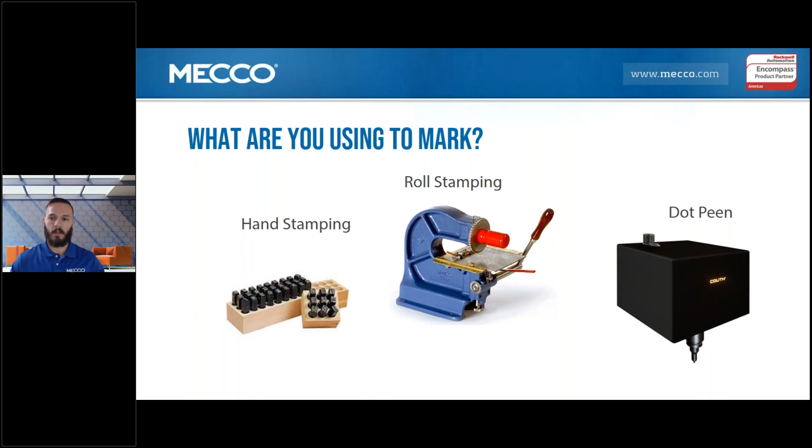But these technologies are slowly fading away because people are really understanding the value of high quality, fast marks. If you're doing direct impact marking, you should be using some sort of dot peen mark, but if you aren't yet, you're not alone. If you're not investing in the right equipment, chances are you're not gaining that competitive advantage. So almost half of US manufacturers, according to a Deloitte study, have not caught up with today's technological opportunities.

I do a lot of work in the oil and gas industry, and one story that comes to mind is we had a customer in the oil and gas industry that was an industry leader, and when I met with them, they were still using hand stamps. They were putting a lot of information on their products, heat codes, part number, date of manufacture, things like that. And because they were hand stamping all that, they were only able to produce about 10 products a day.

Simply by adding the dot peen technology, they were able to move forward and get to the point where the marking of the parts was no longer the bottleneck, and it helped them really understand where their facility was. Obviously, just getting the mark is the beginning, and I wouldn't say that they're operating at the level of, let's say, the automotive industry, which is typically in the forefront of stuff like this.

But looking at the story, we can see who stands to benefit from adopting this technology. And that's you guys. Right now, modern dot peen technology is still a valuable competitive advantage. Just having the system may give you some basic benefits, analysis like throughput and line efficiency numbers. But without some of the other data that you can gather with the most up-to-date systems, you're not truly able to understand the whole picture.

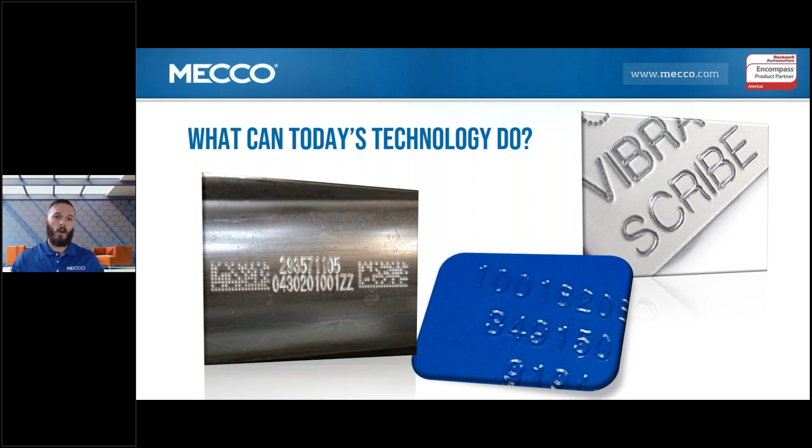So we talked about where we're at, but how do we get there? And the end goal, I think, for every manufacturer is no recalls, no errors, no rework. But talk is one thing; how are we actually going to implement it? It starts with total part marking, meaning every part being produced is tied into a database to reference where that part is and how and where it's going.

And then we look at what information is needed. Is it going to be an automated inline solution or something that an operator has to take to the marker? In an ideal world, the inline solution is great and everything is automated, but we all know that's not always the most efficient way, and it's not always going to be the most feasible solution. So we understand what constraints we're working under and help determine what that end goal for each individual company will

look like. We know getting the parts marked is a priority, typically driven by customer demands, but understanding the application requirements, things like cycle time and marking area, will help us understand what equipment we need. Then we'll look into any additional technologies. A lot of times we're talking about barcode scanners, vision systems, or quality checkpoints. We ask questions like, is the goal to qualify each part? Are we looking to verify the code or scan the code into a database?

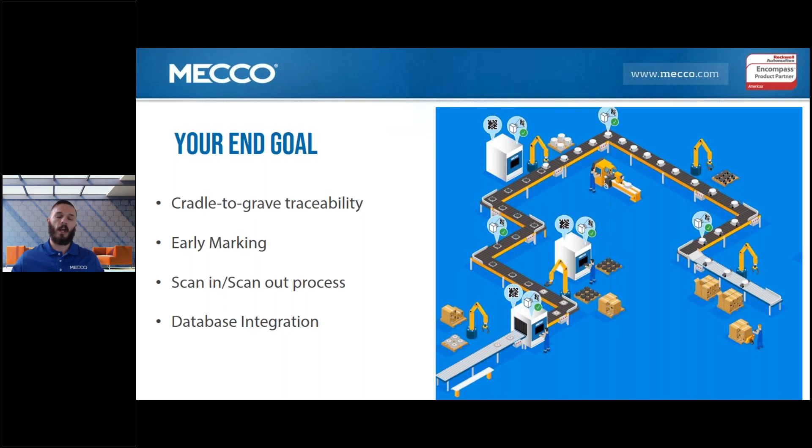So obviously, to start, speed and depth are the number one concern for anybody who's doing marking. You want to make sure that the part is getting marked, that you can read it, and that it's not taking all day to mark it. With our systems, you'll get the fastest, deepest mark in the industry. When you're talking about depth, everyone can say this is the deepest mark in the industry. So I think seeing is believing. I've got a video here I wanted to run through quickly just to show you what we're talking about when we say the deepest.

And you might want to turn your computers down a little bit. I don't know how loud this will be when we run it.

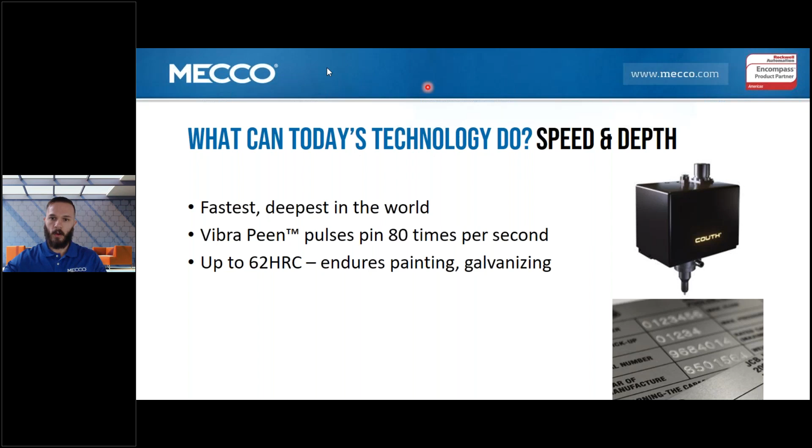So, as you can see there, that's a really deep quality mark, something that we really take pride in. So that's the first point of what your technology needs to have, is that speed.

The next thing is the quality, and you can see a lot of older technologies use what dot peen was, which is that traditional dot peen mark that you can see right here. And that mark, that's okay for a lot of companies, but when it comes to quality, the Vibra Peen or the scribe style mark is just way better.

And these old style marks, one thing that we've seen is that they can be illegible, and based on that illegibility, it leads to shipping issues and quality issues. And then if you're looking at cosmetic marking, the scribe mark is by far the best when it comes to this. It really gives you a crisp mark to go off of.

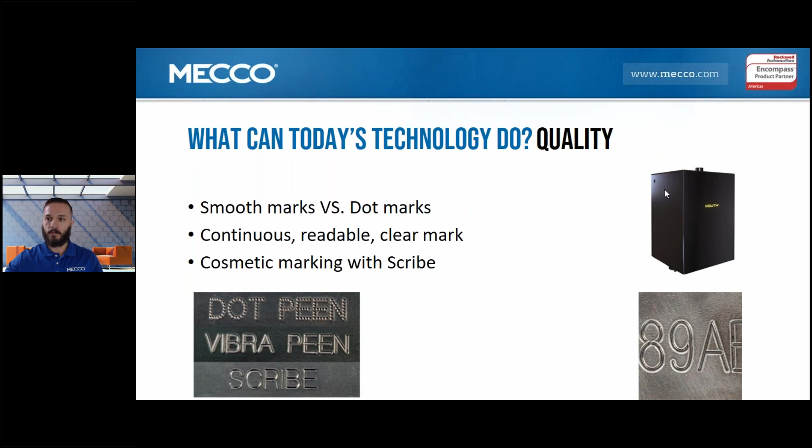So, speaking of the scribe, the next step in our process is understanding your facility constraints. Many of the facilities that we work with are super noisy. They don't have any requirements, but we have seen in the industry where they have a fairly quiet operation and they need something that's going to be safe for hearing and not require any additional PPE. That's where we would really push for you to understand the scribe and its capabilities.

The scribe, when used, allows for quality marks at decibels 30% lower than industry standards require. And so, like I said, it helps with preventing the need to use additional PPE. And so I've got a video again here that'll show you what that sounds like.

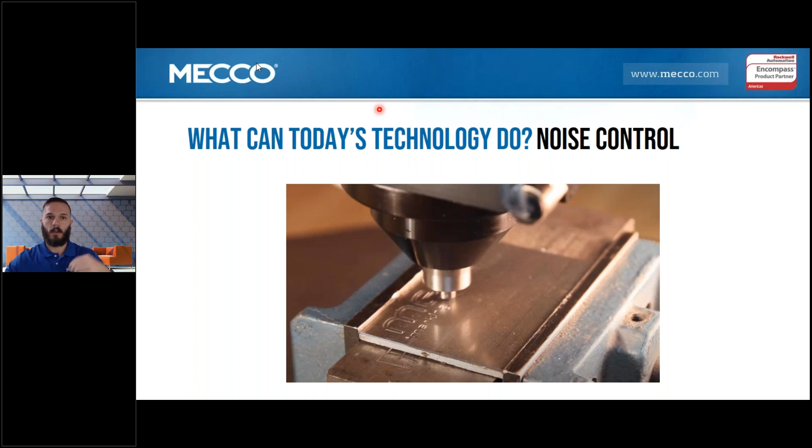So as you saw there, I mean, that is a crisp mark. That's a great machine to use if quality is the most important thing, or if you have issues with noise control.

Once we figure out what technology we're going to use, we're going to start looking into the competitive advantages here. And the first way to look at this is by adding a 2D or QR code to your system. These codes allow the company to input and collect much more data without having a large footprint. I mentioned earlier the oil and gas industry example where they're putting 6-7 lines of human readable code onto the part. And while that may be a requirement, adding a simple QR code like you see here allows you to have much more data in a much smaller footprint.

This one here is just an example, but if you put this on a piece of metal or whatever component you're marking, it would have this URL below it. Obviously, that's kind of a basic example, but if you use that, you can link that URL to a database. This is where we start to get into that scan in, scan out idea. And that's where we're going to start talking about the cradle to the grave traceability. It shows things like where the part's been, what it's been through, quality standards that the part needs to adhere to, and missing shipping standards if the process fails a quality check.

An example we had was we were working with a company that implemented the machine, and at the time they were just doing part numbers. They were doing large quantities, 5,000 or so per batch, and they had 4 batches that were going out, and they weren't tracing what batch was being shipped out. It was, mark the part, send the part.

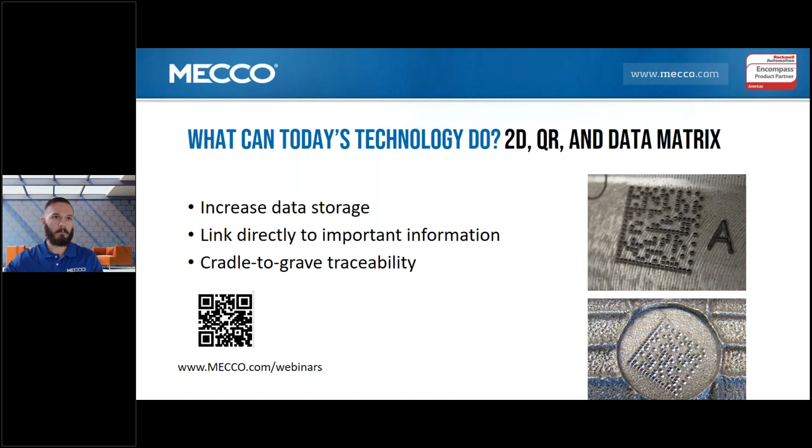And then the last really important piece here is the connectivity. We talked about it in the previous slide, but our machines are able to tie into any ERP or manufacturing process software using Ethermark.

That technology will allow you to use PLC to not only query data, but you can also adjust locations and other parameters, what to mark, all through your database rather than having someone manually changing that. The ability to tie in prevents things like accidental keystrokes, extra spacing, mistyping information, or just completely forgetting information because it's being pulled from that database. It prevents operator error.

Additionally, that system can also output when a mark has been complete, and it tells the software what part of the process it's currently at, where it's going, and as it scans in, scans out, you can see the whole picture. If a part went from being scanned to paint and you missed 4 processes in the middle, it's going to tell you that data. So you'll know, hey, let's see what's going on and why that happened.

We want to make sure that our processes are not only complete, but they're robust. So by adding that, you have that improved security of, okay, I know this is working. And by adding the database, you're preventing things like, we had this one example where it was an automated system, but they had an operator overlooking it, and they started having errors and they weren't entirely sure what was happening. Well, what happened was the operator was getting into the machine and manually changing things, even though they weren't supposed to.

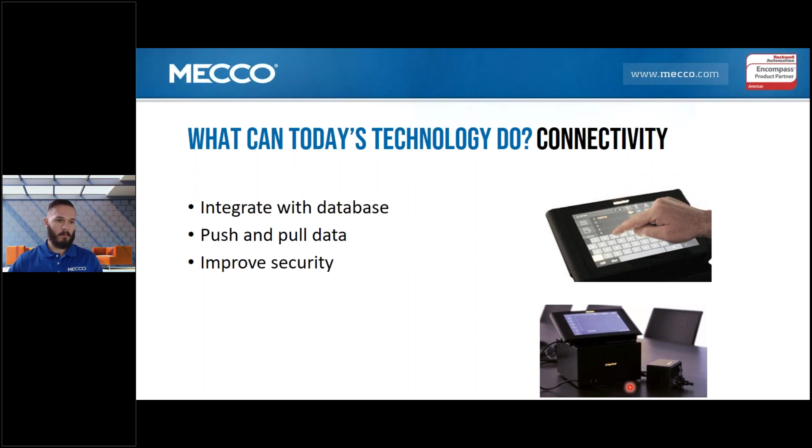So I know I put a lot of information out there. There's a lot of things that you can do with this technology, and I can definitely answer any questions as you guys have them. But no matter where you're at right now, the first thing you need to do is understand what the right solution for your company is. And that can be labeled in short-term, mid-term, and long-term goals.

We want to help you succeed, and you know your company the best. And we think with you knowing your company and us knowing the technology, we can work together to help truly understand what your needs are. And based on that, talk as a team about how to get you that competitive advantage we've been talking about. Typically we start with some basic questions: material, application, what kind of integration you're looking to do, near term and long term. And that'll really get us to the bottom of what the issues you're seeing are. And once we define that, we can really understand what the solution will look like and how we can get to that point.

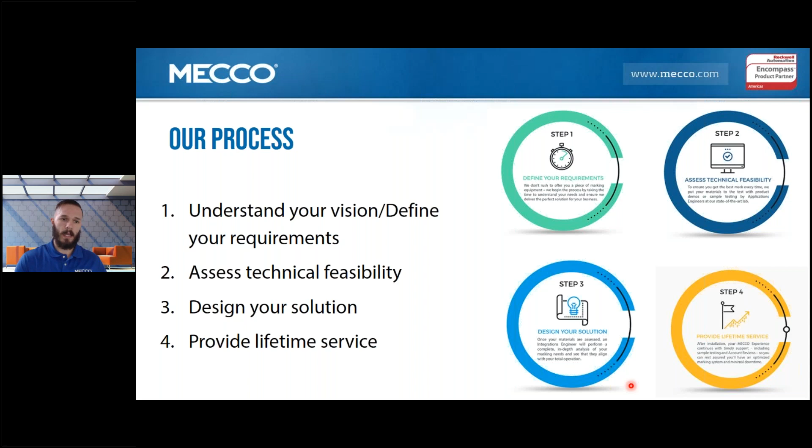If we're thinking about marking, the main goal is to think, hey, it's not a requirement from our customer, it's a way for us to solve company issues.